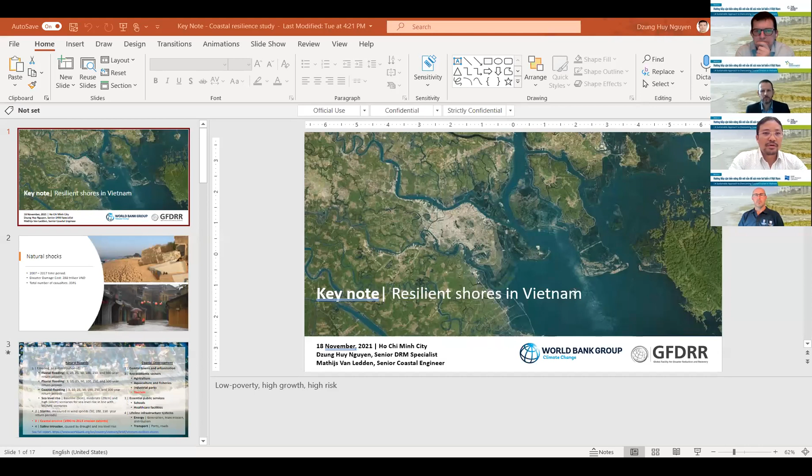Okay. Okay. Hope you all actually see the screen.

Okay. I don't actually need to give you the damage figures in the country, which you have already seen. You're already familiar with this. But the bottom line of this, Vietnam is one of the most vulnerable countries to disasters in the world. So every year the direct damage actually costs about 1 to 1.5% of the national GDP in Vietnam.

With this, our study actually focused on a couple of the key or major hazards in the coastal area, including fluvial flooding, coastal flooding, sea level rise, erosion, and drought as well as salt intrusion along the coast. So of course we use the combination of hazard scenarios, as you have already seen in the slide.

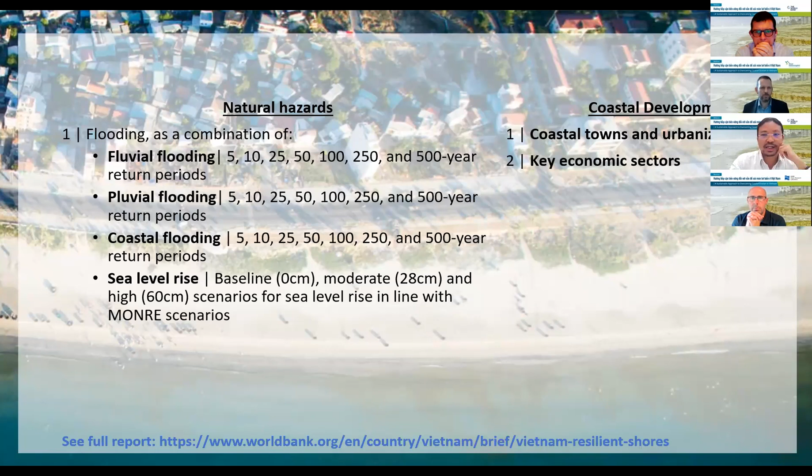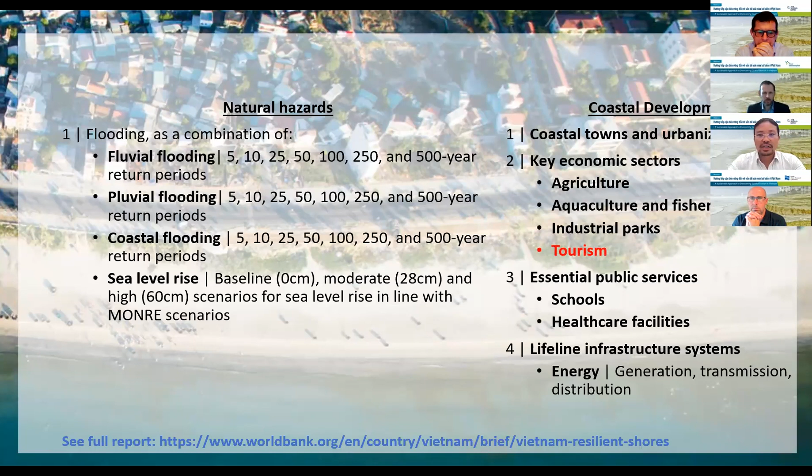Together with this, we actually overlay the different scenarios of hazards with some of the very key economic sectors and infrastructure sectors, including agriculture, aquaculture, industrials, tourism, energy, transport, urban development, school and healthcare facilities. These are the key services and key economic activities in Vietnam, particularly highly concentrated in the coastal area.

All right, so we actually produced a short animation video capturing and highlighting the key results of the analysis, which also tries to show the participants what level of risk the coastal provinces have been facing in the region, and what the risks would be in the future.

The organizer, may I ask you to share the video with the participants, please? Thank you.

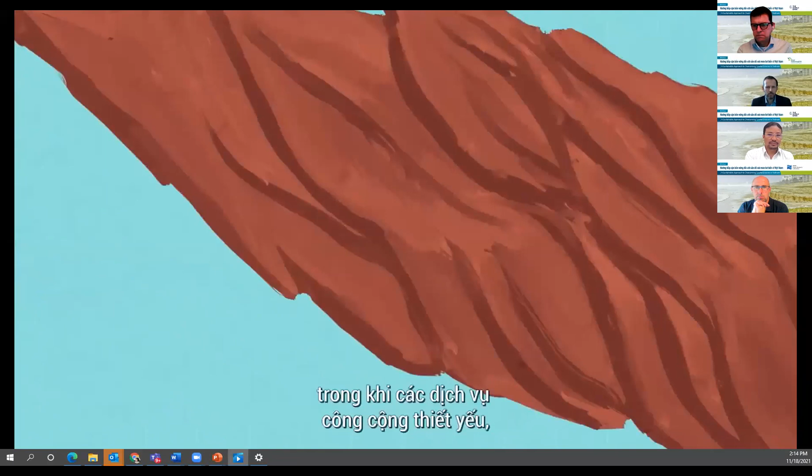With a coastline of over 3,200 kilometers, Vietnam is endowed with coastal areas that have the potential to be powerful engines of development and prosperity. That is, if natural shocks don't put it all at risk. Typhoons, tropical depressions, storm surges, floods, coastal erosion, and saltwater intrusion regularly threaten livelihoods and reverse years of successful development. Such climatic shocks impact virtually all key economic sectors: agriculture, fisheries, tourism, and industry. Lifeline infrastructure systems like energy, transport, and water face heavy disruptions, while essential public services such as schools and hospitals are affected.

In Vietnam, more than $2 billion in assets are lost every year due to natural hazards. And that doesn't even count the impact of disasters on people's well-being and livelihoods. The country has been hard at work, making impressive progress in managing disaster risks. Over the years, the government has put in place strong legislation, effective weather forecasting, successful community-based programs, and an extensive dike system. But urbanization in coastal areas is rapidly growing. This also means that more and more people are at risk, and new developments are focused in high-risk areas as safe locations are already occupied. Climate change will only increase these challenges.

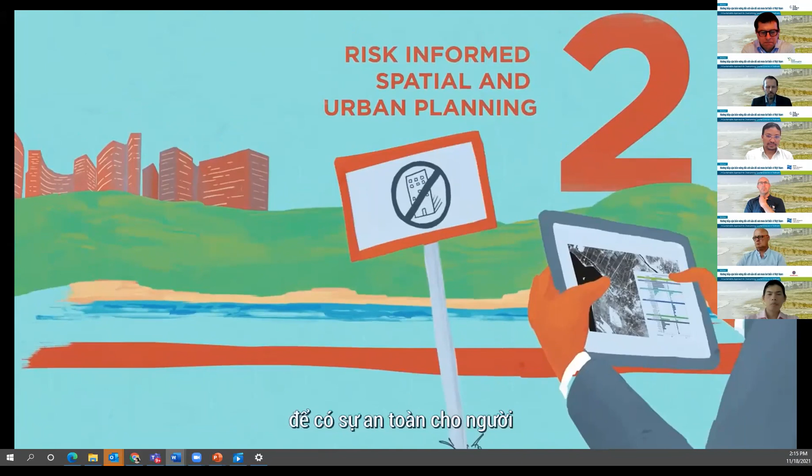In the face of increasing disaster risks, the World Bank's Resilient Shores report highlights 5 key recommendations to help Vietnam strengthen the resilience of socio-economic development in coastal zones. Better hazard data and asset management systems need to be established to enable people to make robust decisions in all sectors. Risk-informed spatial and urban planning needs to be ensured to keep people safe and make resilient investment decisions. The resilience in infrastructure systems needs to be strengthened through reinforced safety standards and better design and maintenance. Upgrading dikes is a necessity. Nature-based solutions have a lot to offer and must not be overlooked.

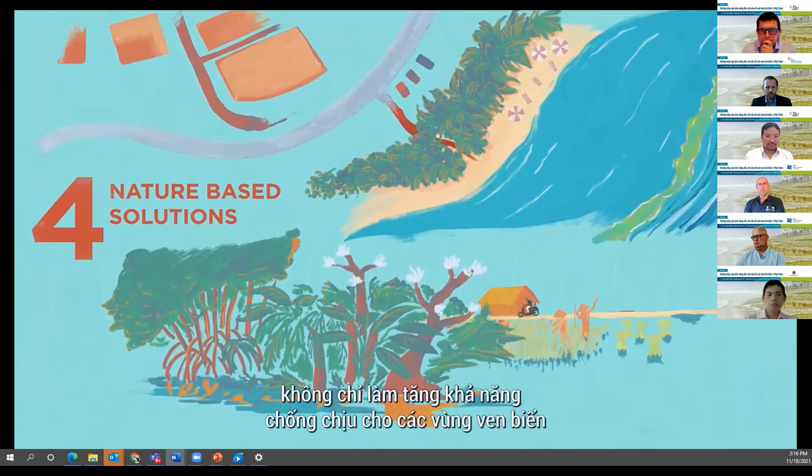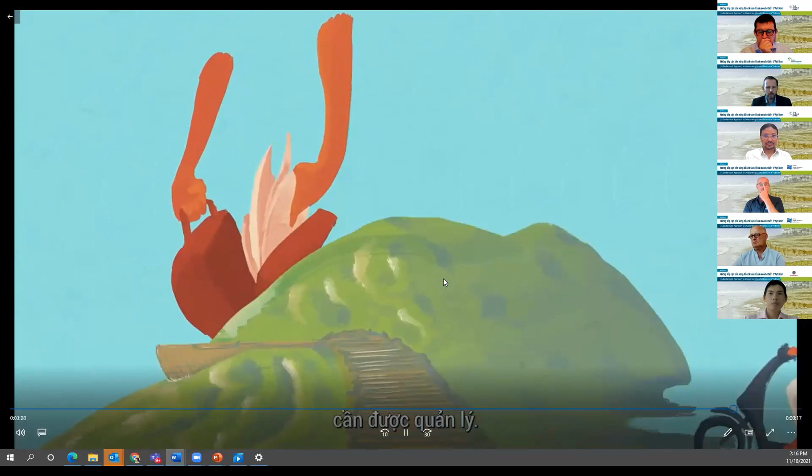Restoring and protecting natural shields such as sand dunes and mangroves not only increases coastal resilience, but yields valuable economic opportunities for communities. Early warning systems need to be improved, while emergency planning, civil protection, and a comprehensive national financial protection strategy can greatly improve Vietnam's capacity to respond and recover from shocks. Vietnam's coastal areas have potential to be home to prosperous and resilient communities, towns, and cities. However, opportunities in the coast come with risks that need to be managed. But by striking a balance between risk and opportunity, it is possible to safeguard Vietnam's coastal development for generations to come.

Yeah. Thank you so much. Let me go back to the presentation. Okay, over to you, Mathijs. Thank you, Dzung. And next slide, please. Yeah, I'm trying. Why doesn't it move? Okay, sorry. Here it is. Okay. Yes, please also show the graph.

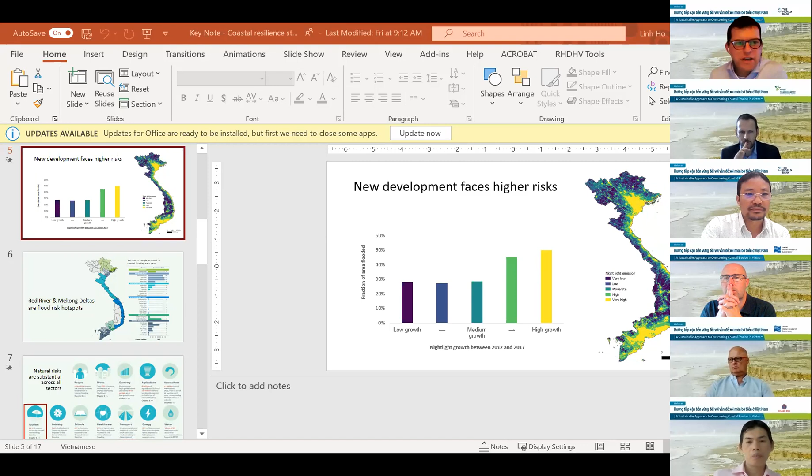I think the computer actually reacts slowly. Oops. I'm sorry. Oops. Perhaps we need help from the organizer. Sure. If you also can please open the presentation and help us to manage it. I think there's some technology problem on my side. Thank you. Yes. Can you start sharing the full screen, Linh? This slide, yes, please.

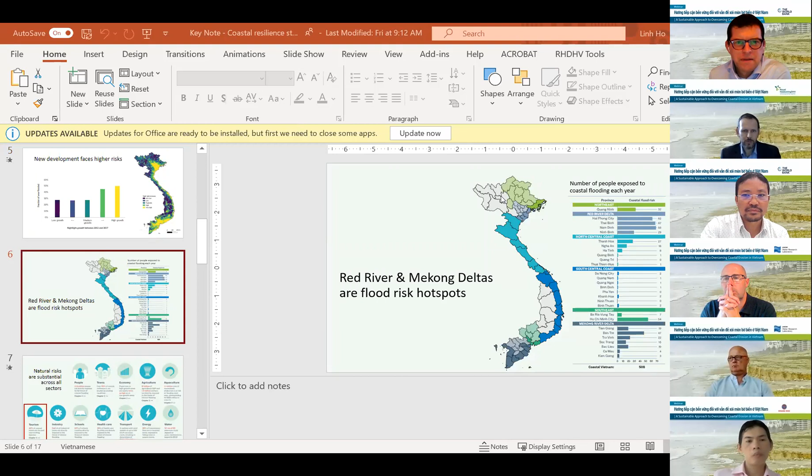Thank you. Yeah, this is another example of one of the results. So the graphic here shows you the people who are at risk in the various coastal provinces in Vietnam. Very clearly, this graphic shows that mainly in the north, in the Red River Delta and the various provinces over there, but also in the south, in the Mekong Delta, the most people are exposed. So those areas are the so-called flood risk hotspots. Next slide, please.

So as Dung already said, we have made in this report an analysis of all kinds of sectors in Vietnam, and I think what is highlighted from this report, and that's also the main takeaway for maybe this audience, is that not only tourism assets are at risk, but also a wide variety of other sectors, and those are of course also very important for the well-being and for the sustainable growth of the tourism sector. So it includes people, towns, but also industry and schools, healthcare systems. So all these assets and all the people who work there are at risk. Next slide, please.

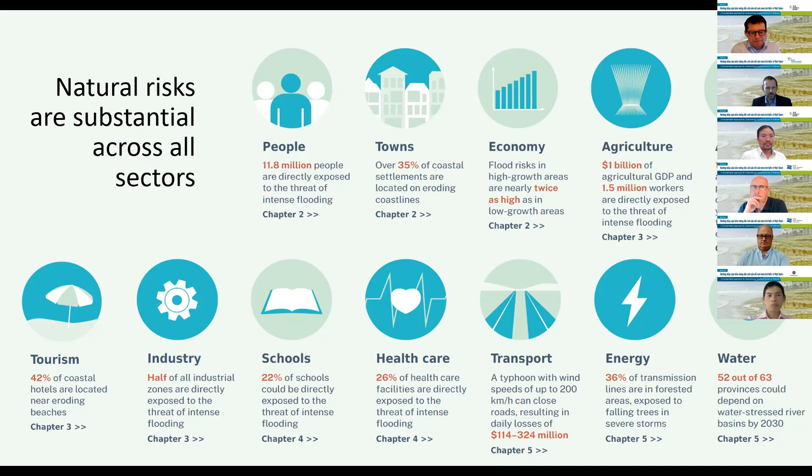This slide tells you the story about one specific asset system, which is very important for certain areas of Vietnam. It's about the dike system, especially in the north and also in the south. So in the Red River Delta and in the Mekong Delta, there is an extensive dike system that protects the area from flooding, and also the communities in those areas. And the report has made an analysis of how the current dike system compares to the safety standards that have been set by MARD. And it shows that many of the dikes in Vietnam do not meet the prescribed safety standards, and significant investment is necessary to bring them up to the standard.

And even then, with the significant growth in the coastal areas, there is also a need maybe to upgrade these safety standards even further and to protect all this economic value and the people who live in the coastal zone. Next slide, please.

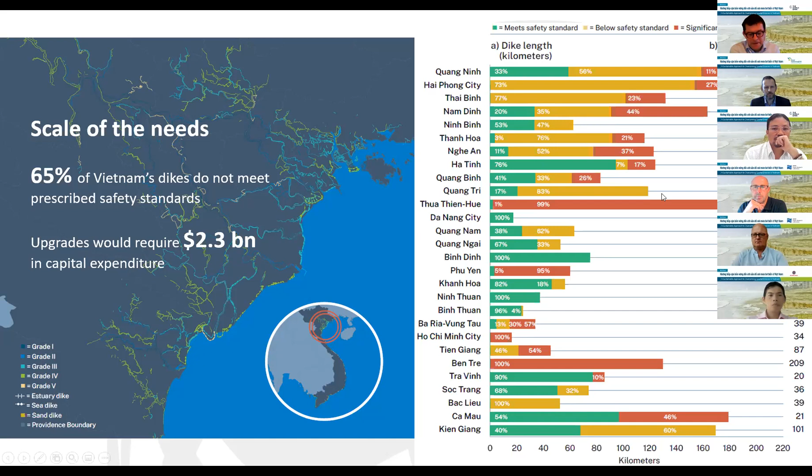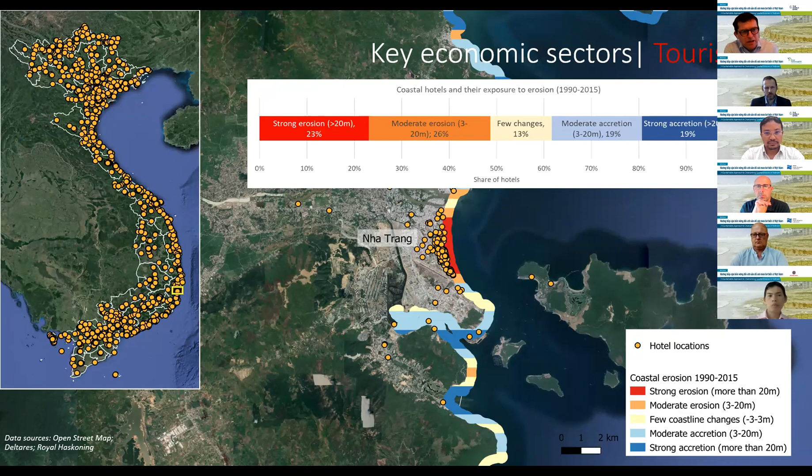So if you zoom in specifically on tourism, then coastal erosion is a serious threat. As part of this analysis, a consistent data set was made for 5,658 hotels all across Vietnam, and that data set has been overlaid with coastal erosion maps, but also with flood maps. And it clearly shows that 60% of the hotels are located within 5 kilometers of the coast in Vietnam, and almost half of them are located near a coastline with strong or moderate erosion. So it shows you again that coastal erosion is a nationwide issue, but it's a particular threat to the tourism industry in Vietnam. Next slide, please.

In the analysis of the Resilient Shores report, we also zoomed into various coastal hotspots to see what kind of strategy could be followed to make the coastline more sustainable. And one of those locations is Phan Thiet. This location has a rapidly developing local economy, and it's also a touristic hotspot which received 4 million visitors in 2017. But this area has also seen severe erosion at several places. In some places, the coastline retreated by over 100 meters.

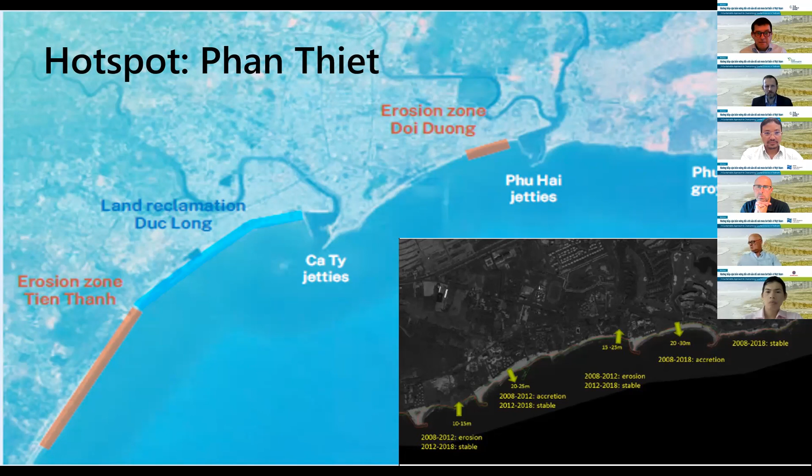So if you walk along the coastline in this area, you see various attempts at all kinds of solutions to combat erosion, from concrete blocks, concrete revetments, geobags. All kinds of solutions have been tried, but none of them have been very successful. And what you can also see is that often these solutions have been taken at a local level to protect one or two specific resorts or a specific section of the coast.

The analysis that has been carried out for this specific area is that the coastline is of course not a static situation. It varies because of storms, so it can sometimes retreat a bit, but sometimes it can also grow back to the original situation. So building assets very close to the coast maybe sounds attractive, but it's not a very good idea. And also these hard structures often interrupt the natural sand transport along the coast, which often gives downstream effects to other locations.

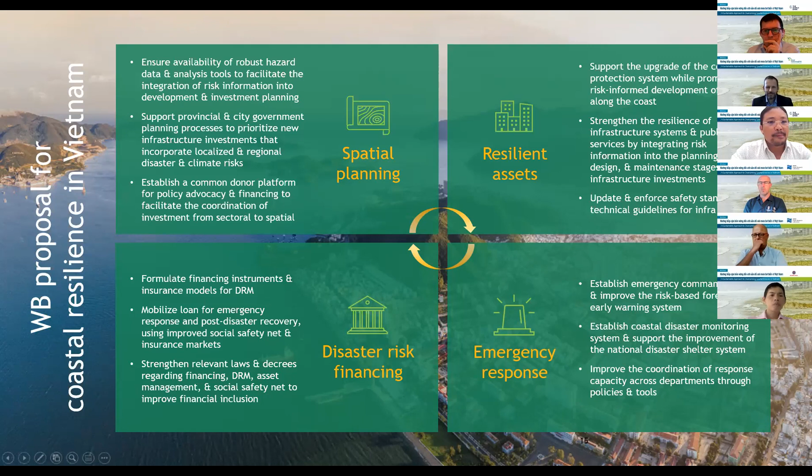So the government of Vietnam right now is working with the World Bank on the first phase investment, which we expect to start being implemented in 2023. So I will stop here and over to you, Justin. If there are any questions, both Mark Tai and I are happy to answer. Thank you.

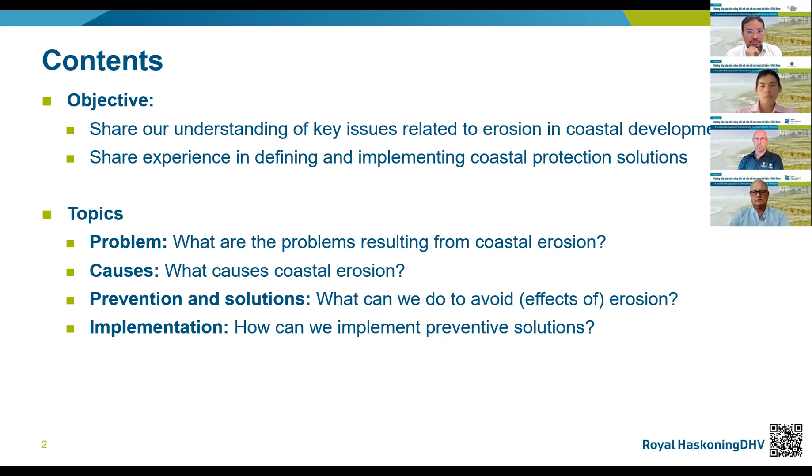A little bit of an introduction about myself. My name is Joost Lansen. I have over 15 years of experience in coastal engineering globally, and I've been working in Vietnam for about 8 years on quite a few projects along the coastline, seeing a lot of changes over time. I work for Royal HaskoningDHV. We're originally from the Netherlands, so we have a strong water protection background, and we have been active in Vietnam for 40 years, working in coastal resilience.

So what are the problems related to coastal erosion? Firstly, here is a very nice quote which we found on TripAdvisor from a tourist who came on holiday to Vietnam: after unpacking, we went over and saw the entire beach had been washed away. Had Booking.com informed us? No beach, just a sheer drop to where the waves were crashing. What a disappointment.

On our last night, we were having a cocktail on the beach bar, which is hanging on a cliff edge, and a digger came down to the beach as the tide had gone out and was moving sand to try and rectify what had obviously been caused by a monsoon. This, and also the pictures on the right, shows that due to local erosion at various developments for the tourist sector, the quality of the beaches is going down, and that's viewed negatively.

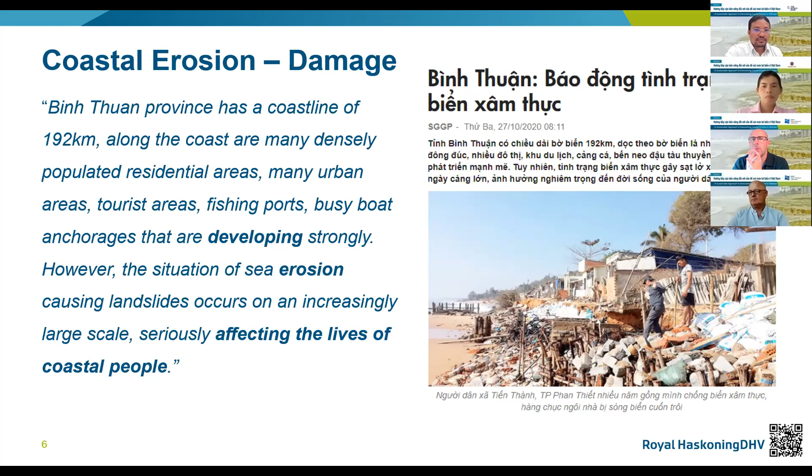So what is really the problem with coastal erosion? Coastal erosion leads to a loss of the beach, which in the end results in an unattractive coastline for tourists. So the beach is gone, which reduces the experience of the tourists there.

It also damages property. We see a lot of property being damaged along the coastline. When it's being built, often we see a nice beach, but over time, due to erosion or during storms, a lot of property is being damaged.

And lastly, there's also a loss of the natural and cultural value of the coastline. A lot of people appreciate, obviously, the beautiful Vietnam beaches. It's being used for fisheries, but also by the local population to go out, but it's being lost.

Lastly, the invested value of a lot of these properties is going down. Because of how visitors appreciate an eroded beach, actually the property value will go down because the appreciation is much lower. And we see a lot of these examples along the coastline.

So what causes coastal erosion? I would like to demonstrate in the coming slides a little bit of the engineering insight into why coastal erosion occurs, because we think it's very important to have that understanding to later develop protection solutions and management solutions for how you would mitigate erosion. So I will touch upon three main causes.

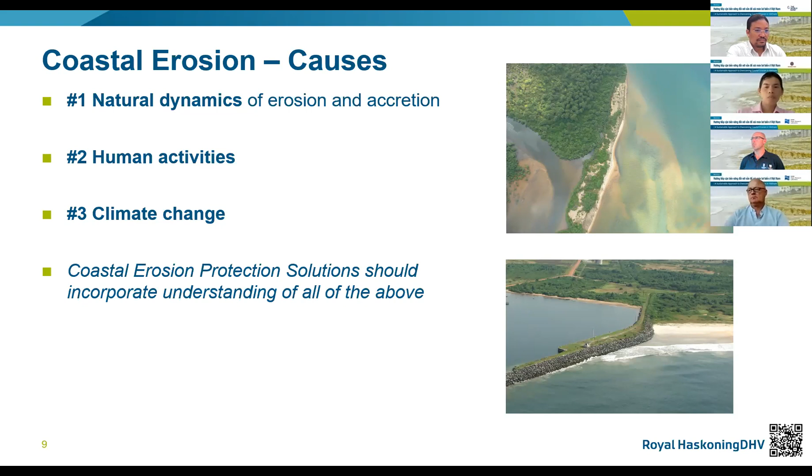First of all, if we look at the beach, you see here a very nice beach with water, waves, and a surf zone. Actually, this beach is subject to the forces of nature—that's tides, currents, wind, and waves.

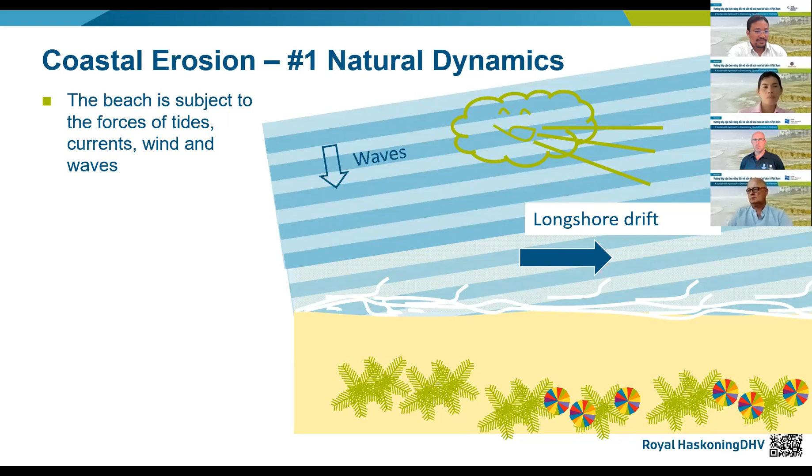If we look at the coastline, this is a schematic picture. We see that there's a beach, there's water, there's waves. But what you often don't see clearly when you're standing on the beach is that there's a longshore drift—some kind of flow along the coastline which transports water but also transports sand. So in the foreshore, there's sand movement being transported by this flow, and it flows as some kind of sand river along the coastline.

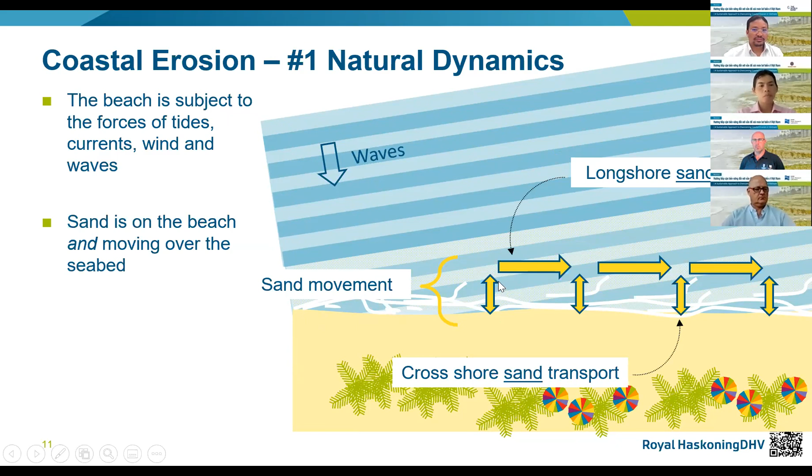Not only is this moving sand, but we also see that sand moves from the beach onto the seabed. Throughout the year, sand is moved from the beach onto the seabed. As a result of this, we see actually that there's a natural variation in accretion and erosion, during storms or seasonal variations.

Waves can be higher, and as a result of that, there will be erosion. So sand is actually put in the foreshore, and in the calm season, the sand is going back to the beach. So when you visit some beaches at different periods of the year, you would see actually that there's erosion and accretion.

One of the key messages about this is that the coastline is by nature dynamic, so any beach needs some space to breathe. When planning and looking at coastal developments, you always need to make sure the coastline can follow its own dynamics and has this space to breathe. So building close to the coastline is often not a very good idea.

Secondly, when we look at human activities, what we often see is that for property developments, structures are often built on the coastline which actually block the longshore transport I was talking about. So this flow of sand along the coastline is being blocked, for instance, by a groin. There's an example in the upper right corner. As a result, one side of this groin will get more sand.

Whereas the other side, there will be less sand, leading to erosion. What we often see is the person on the left is very happy, he has a very nice beach, but the person on the right-hand side is less happy because his beach has been eroded by the structure, which was probably built by the person on the left.

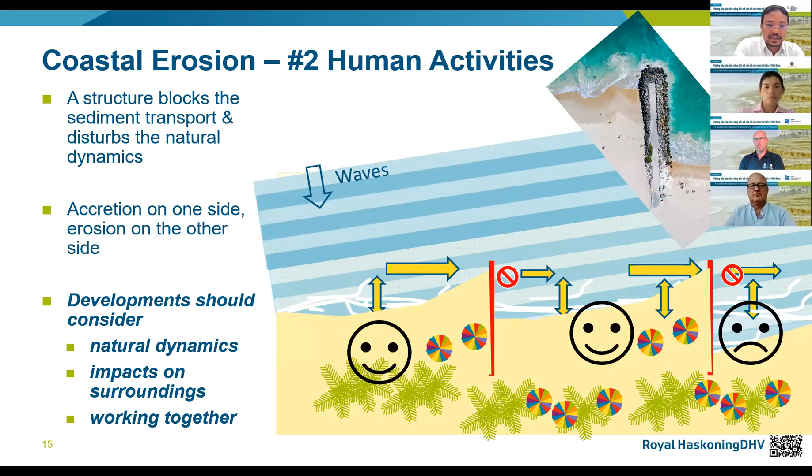And often this is an ongoing process. So the next neighbor also will make something, and then the one next to that will be unhappy. I think the takeaway from this is that when we look at these kinds of developments, we also have to look at the surroundings, the neighbor. The only solution to make a resilient and sustainable beach is to work together, because this process will go on and will not solve the problem altogether.

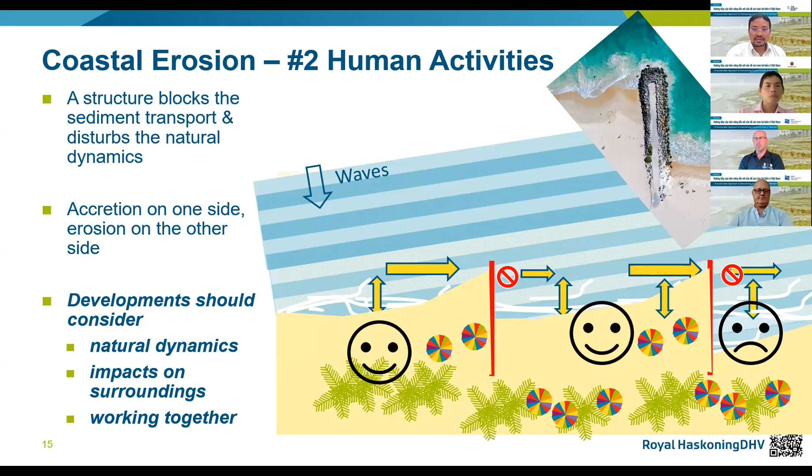So not only do we see this with groins, but we sometimes also see revetments being built. Obviously this stops the erosion, but here too the neighbor will be suffering, and it's also questionable whether, even if erosion is stopped, this leads to a high-value beach.

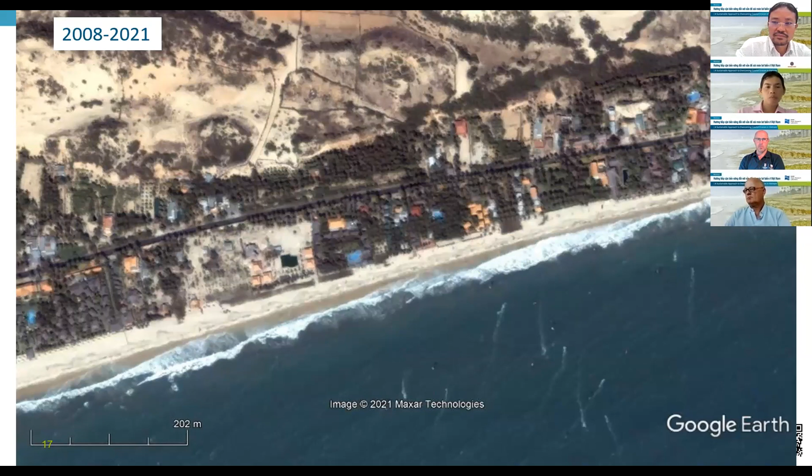Now when we look along the coastline of Vietnam, I think there were some pictures already. This is a picture of a beach in Mui Ne, from 2008. We see a very nice natural coastline. But when we look at the situation today, we see various structures have been built to protect some beaches along the coastline for various resorts, but at some places the beach has disappeared completely.

In this particular situation, some people have been protecting their coastline, but by not approaching it in a consistent way with all the neighbors in the area, about half of the beach has disappeared.

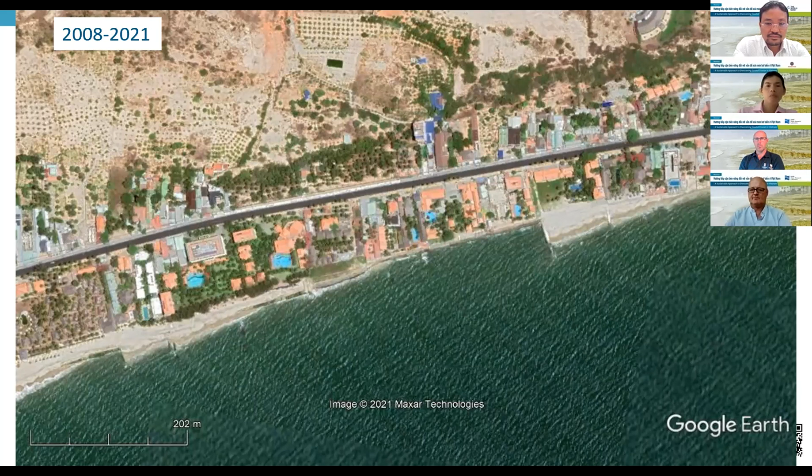Now when we look at the third cause of coastal erosion, that's climate change. We know that due to climate change, sea levels rise, and when sea levels rise, it will in the end result in coastal retreat, because the water level is higher, so it will approach the beach in a higher way. But more importantly...

We see that part of the effects of climate change is that storms will be more intense, or monsoon seasons will be stronger, and that leads to more erosion than accretion in a dynamic situation. As a result, beaches erode. So even without any human intervention, we would see the beach retreating as a result of climate change.

One of the conclusions to be made here is that we know climate change is happening. So if we don't do anything to increase the coastal resilience, erosion for sure will happen. Measures are definitely required, otherwise the beach will erode anyway.

So obviously, as I said, there are solutions to work against coastal erosion for protection. I will touch upon a little bit of what kind of solutions we can think about. This is not going into high detail, but I will touch upon the key understandings.

So what are the benefits actually of protecting the coastline? Obviously you not only mitigate the negative impact of coastal erosion, but you also protect the development itself, and you also protect the beach. Without coastal protection, if the beach is gone, there's also a loss for the natural environment, but also for society as a whole—people enjoying the beach is not possible anymore.

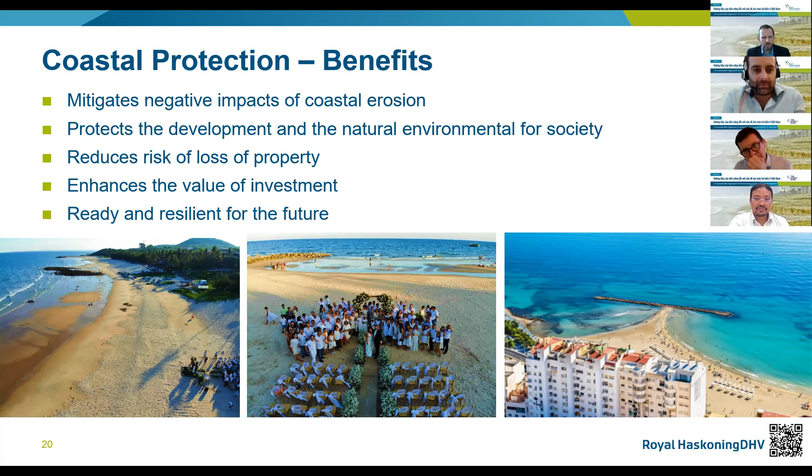So what kind of solutions do we have?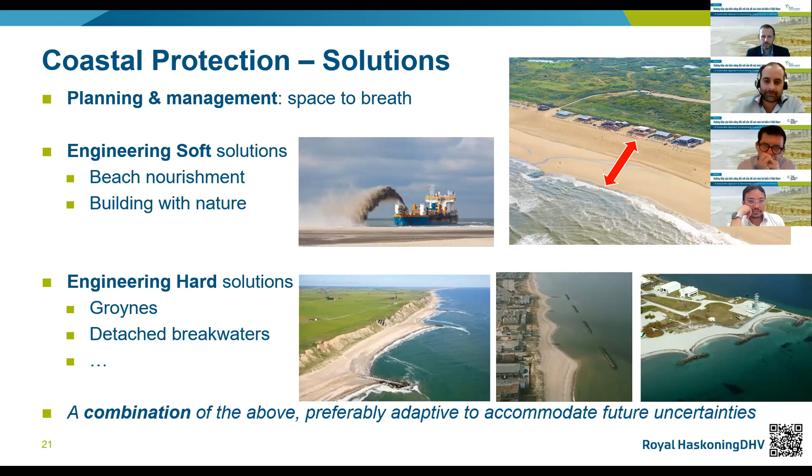So when we think about these protection solutions, how are we developing these? What steps would we normally make to come up with solutions for these properties? There's a few steps we often make when we develop the solutions, and I will try to highlight step by step how these steps are being made and what kind of activities are important.

The first step often is an inception phase where we try to understand the dynamics. It's very important to understand the dynamics of the coastline to come up with proper solutions. So what we try to do in the first step is identify the key issues. Why is erosion happening? Is it a result of storms? Is it a result of human structures in the neighborhood? What is the reason?

Secondly, data collection supports that. There's a lot of data available which can support building up that understanding. Thirdly, when we want to prepare coastal protection solutions, we also need to identify the requirements. What type of coastal protection do we need? Are there any requirements from a regional or national master plan? What are specific requirements from the property development? For instance, if it's a resort, are swimming condition improvements required? And lastly, we'd like to minimize the negative coastal impact as much as possible. So identifying these requirements in the first step is important.

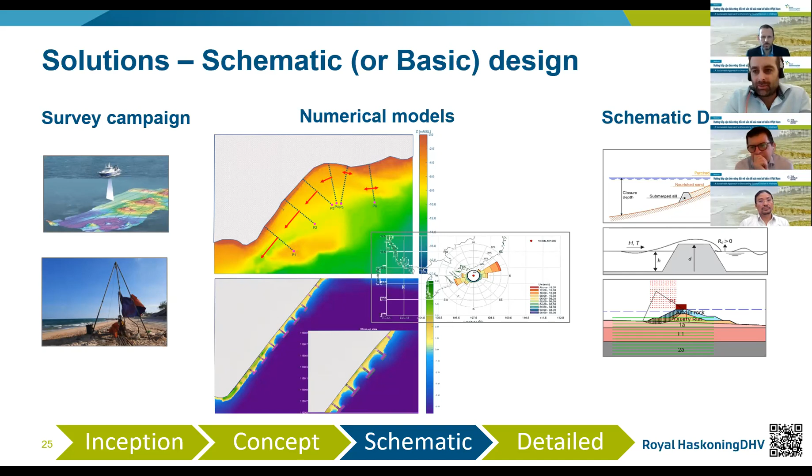When we have a good understanding of the required solution, we go into more detail in the schematic design of the structures, which can be groynes or breakwaters, etc. Lastly, when we have a good understanding and know exactly the dimensions of the structures, we do a detailed design in which we design these protection solutions in high detail. I show one example here, rock, but it can also be a detailed design of a nourishment or a planting solution.

One of the speakers after us will tell a bit more in detail about physical models. Physical models can be used to test some of these protection solutions, whether they are suitable for the local climate, but also whether cost optimizations can be made. So this can be a tool in the design. And lastly, obviously, it's construction.

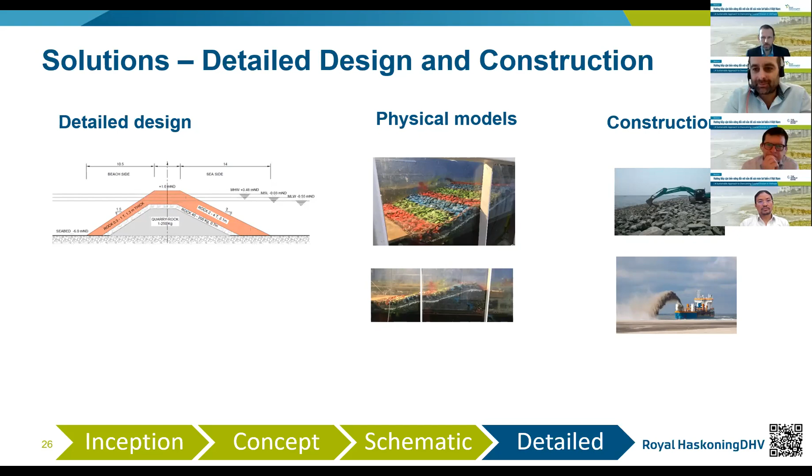So what are the key takeaways of my presentation? What we would like to convey and ask the participants to bring home later this afternoon. Firstly, coastal erosion destroys property and reduces the quality of the beaches. As I've shown, it's not only for tourism, but for all kinds of industries. Because of a vanishing beach, the appreciation would be lower and we lose the natural value of the coastline. Erosion occurs as a result of various causes: natural dynamics, human interventions, and also climate change.

We have to understand these natural processes to develop resilient coastal protection solutions. So we have to have a good understanding of why coastal erosion occurs at that site. And when we develop design solutions, we go step by step in understanding why, and what solution will be best for the site to protect against erosion.

When we come up with these solutions, we need to also consider the adjacent coastline, and collaboration with various parties is required. If we don't do that, we may solve it at one location but create problems in other locations. So lastly, if we want to have a nice beach, it's a common interest for us all. Engineers, but also developers, the government, institutes, universities, so that we work together and come up with good solutions to protect our coastline of Vietnam.

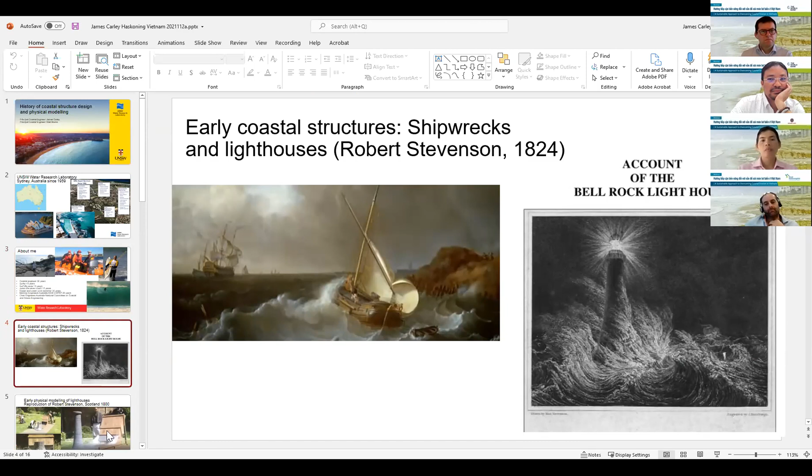This was an 1824 book picture, a drawing of a lighthouse in Scotland. And believe it or not, this is about the earliest physical modelling I know of. And this is a reproduction. So this is not a real photo because there were no cameras in 1800.

But when they designed this, the Bell Rock Lighthouse in Scotland, they actually set up a system that they filled up with water, and they built the lighthouse in front of the water tank and then ran a jet of water down to see if the lighthouse would collapse. So this was around about 1800, the first physical model I know of in the world.

And with the physical modelling, you always try and test it to destruction. So if it stands up, you always put a bigger event in and a bigger one and a bigger one to work out how much it can actually handle before it actually collapses. Now that was the Bell Rock Lighthouse in Scotland. That was the 1800 physical model.

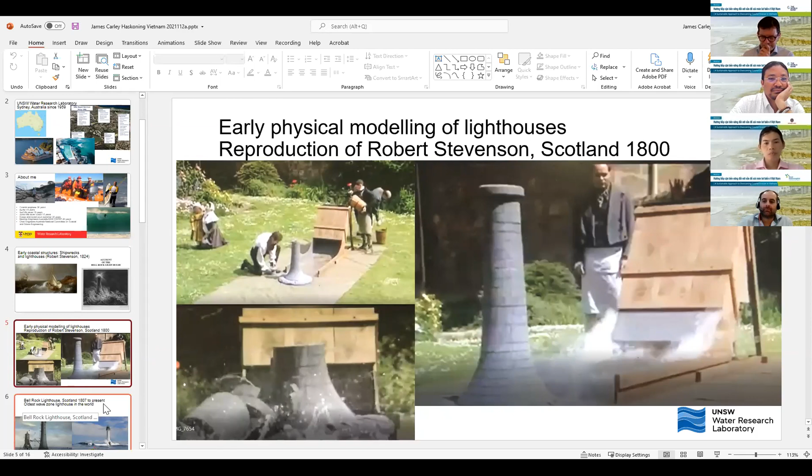That lighthouse was built in 1807, and here it is present day, still there. So it's now the oldest lighthouse in the world that's sitting in the waves. So it's in the tidal zone. It's hit by waves every single day, and its design was originally optimized using a physical model. So that was one of the oldest examples I can find.

Moving a bit more into the modern era. So some of the recent coastal engineering references. So the first major reference in coastal engineering design comes from 1938 by a Spanish engineer, Iribarren, his name was, and he still has legacy in coastal engineering. So he published a paper about how to work out how big rocks need to be to withstand a certain size wave. And that got translated into English, which is my language, in 1949.

In the 1950s, the US Army Corps of Engineers came along and started doing their own work. So what's called the Hudson equation, which is still used to this day by some coastal engineers for rock breakwaters, that was done in 1953. So then from the 1950s onwards, the US Army Corps of Engineers became one of the dominant thought leaders in coastal engineering. So they started producing major publications starting in 1957.

And my organisation, Water Research Laboratory, where Matt and I work, we opened in 1959 to provide advice in this realm. 1973, what was called the Shore Protection Manual was produced, and that is still one of the iconic textbooks for coastal engineering to this day, and it got revised quite often up until 1984.

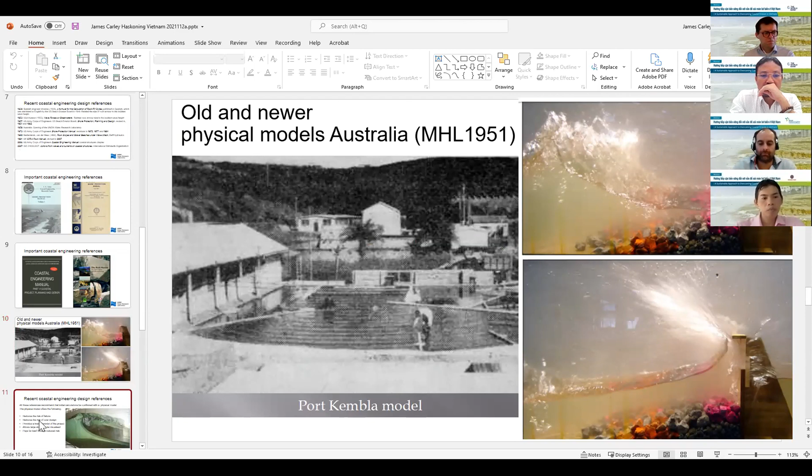So all the textbooks and the design codes that I mentioned earlier, they all provide calculations for how to design coastal protection works, but they all recommend that the publications are used for initial design. And then if it's an important project, you need to physically model it, because that's the only way to get high certainty in the design.

So by physically modelling it, it does the following things. It reduces the risk of failure. That's probably the most important thing, but also can reduce the risk of over-design. So it stops the structure being more expensive than it needs to be. And it provides a faithful 3D picture or model of the project, which is really nice to look at. It allows very large storms to be visualized. So you can dial in any event you want and see what it looks like in the model. So the physical model almost always pays for itself through reduced risk on the project.

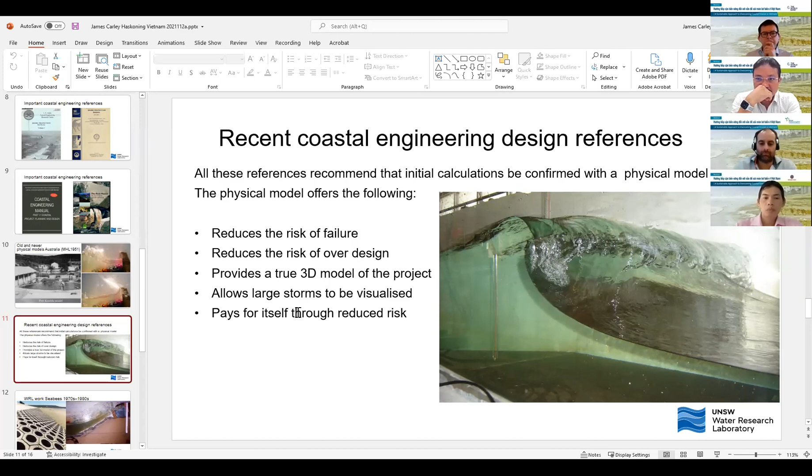So some of the pioneering work done by the Water Research Laboratory over the last few decades were Seabees. These were done in the 1970s. They look like a beehive, concrete hexagon. So these, in the 1970s, were developed at Water Research Lab. Here's a model test of a Seabee wall happening.

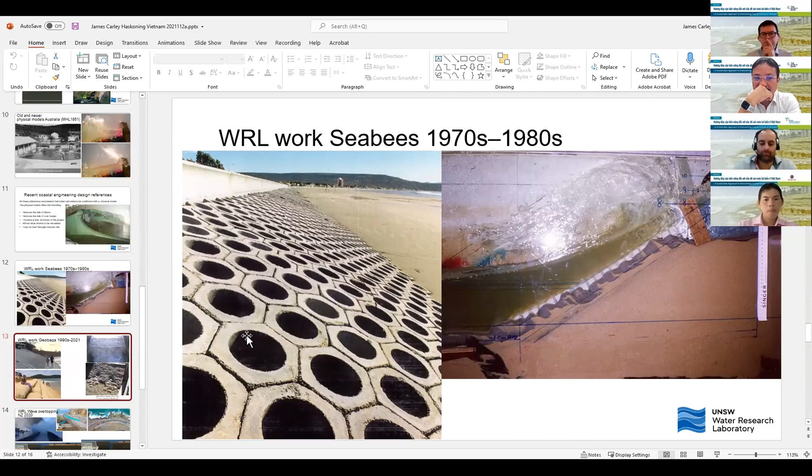Something a bit more recent. So this is the major coastal road in New Zealand, and waves come over the top and damage the cars and the people and the bicycles here. So the waves come over the top of the wall here, through the channel here, and you can see the outcome on the top left.

So we did a physical model of that and ran the waves over onto it, and we can find ways to reduce the overtopping, either through putting extra structures at the base or putting another wall, a wave return wall at the top of it here to stop the waves coming over to protect it.

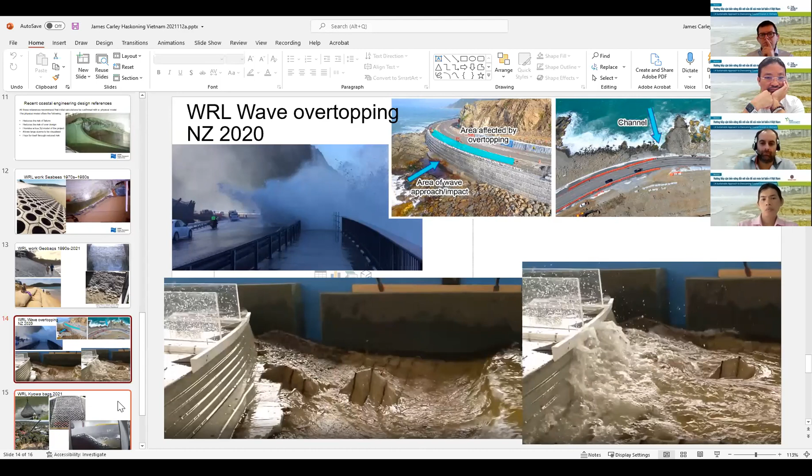So we're just at the moment doing some design curves for those where we build a revetment out of Kyowa bags and we run waves and we work out how big a wave they can withstand before they fail, so that we can develop some design curves so that they can be designed better.

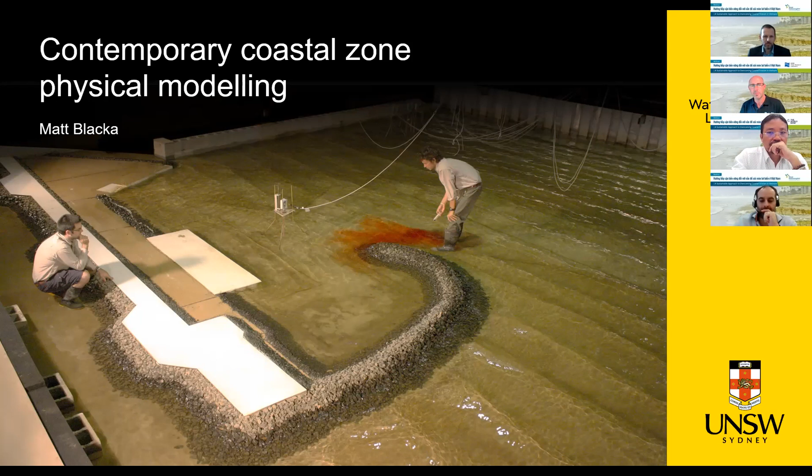In my presentation, I'm going to really step through 5 things. Firstly, I'm going to talk about the different types of models that are used by coastal engineers. And I'm then going to talk about some of the selection processes and why we might choose a numerical model for some problems or a physical model for other problems, and look at how we might arrange a physical model to solve a particular type of problem.

I'm going to run through some nice examples of contemporary physical modeling projects that we've looked at in the past few years and give you an idea of the different types of physical models and how they're used for coastal problems. And then I'm going to provide a quick summary at the end on some of the advantages of physical modeling in particular as a tool, but modeling more broadly.

So we've heard a fair bit of discussion so far about modeling, but if we just take a little bit of a step back and think about what a model is more broadly, a model is just a representation of some process. And in the coastal zone, this process could be anything. It could be the waves breaking on the beach, which is what I've got some animations showing here for. But it could equally be a simulation of the longshore drift process, for example, that was talked about before, or it might be waves breaking on a coastal structure.

And when we think about models in the coastal engineering sense, there's really 3 types of models we look at. There's empirical models, which simulate that process using perhaps previous measurements from field data or laboratory studies. More complicated than that, there's numerical models, which are computer models where you solve some mathematical equations to simulate a process, and that's what's shown in the middle picture there.

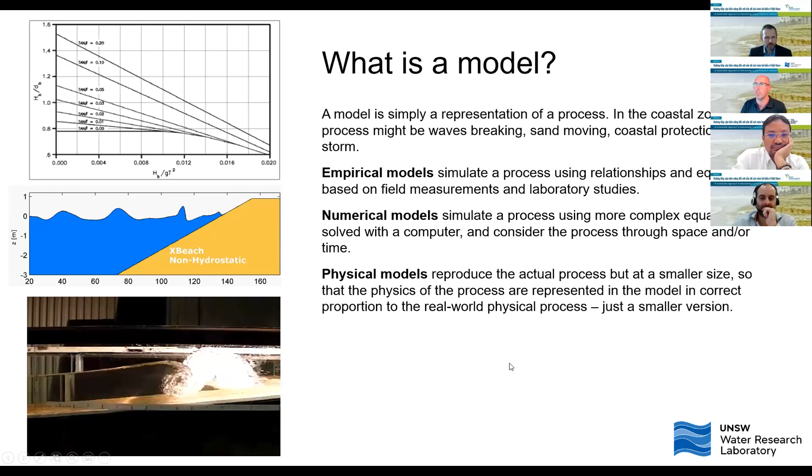In the coastal environment, as it's been pointed out already, there's a few reasons why we might do some modeling. Really, what we want to do though, is we want to be able to predict the response of a coastline or of a structure to the forces and the processes that are going on. So we might want to be able to understand the response of a beach if we put a groin in or a seawall in or a breakwater in.

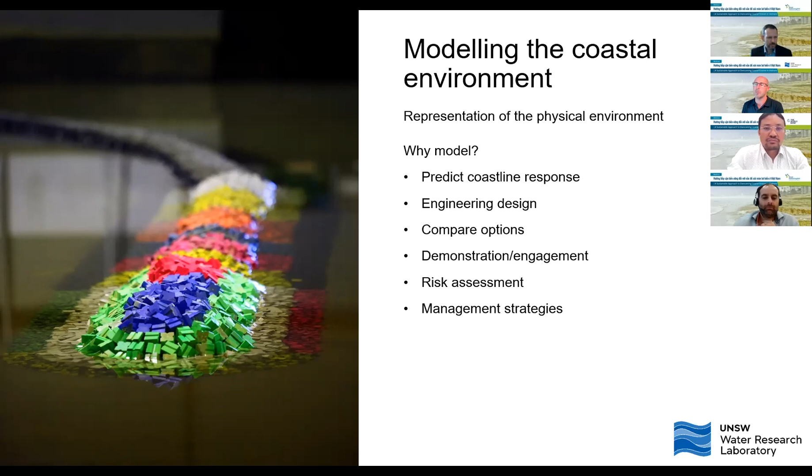We also want to be able to predict the response of a revetment or a structure to perhaps a typhoon or a large wave event, so that we don't get that wrong and we don't end up with failed structures all along our coastline. So the modelling really helps us to understand and to be able to predict these kinds of things ahead of time before we go and build these structures. Models are also used to compare different options. They're used to demonstrate and engage with stakeholders to be able to show what the outcomes might be of a project. And they're used for risk assessment and development of management strategies.

So we might have really big scale processes that happen over days or months. And they might be things like ocean currents or tides, might be over hours or days. And they happen over a big area. Then at the bottom end of the scale, we have things like wave overtopping. And that happens over seconds or minutes and a much more localized scale. And so when we're thinking of a modeling approach, it's often good to think about the spatial scale and the time scale that the processes are happening over.

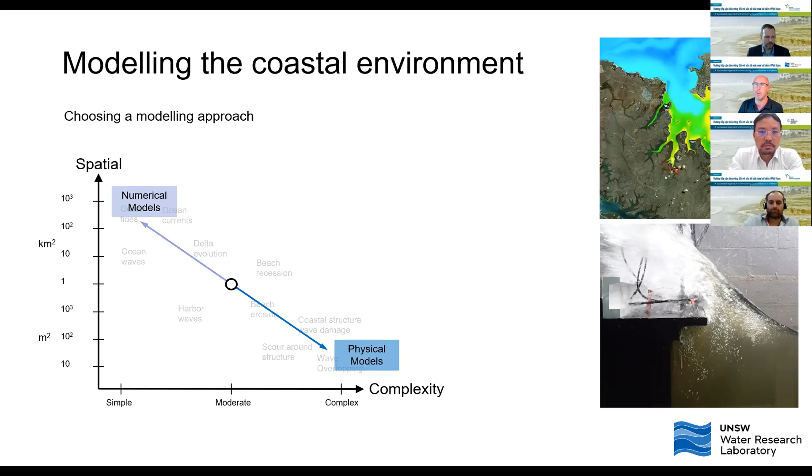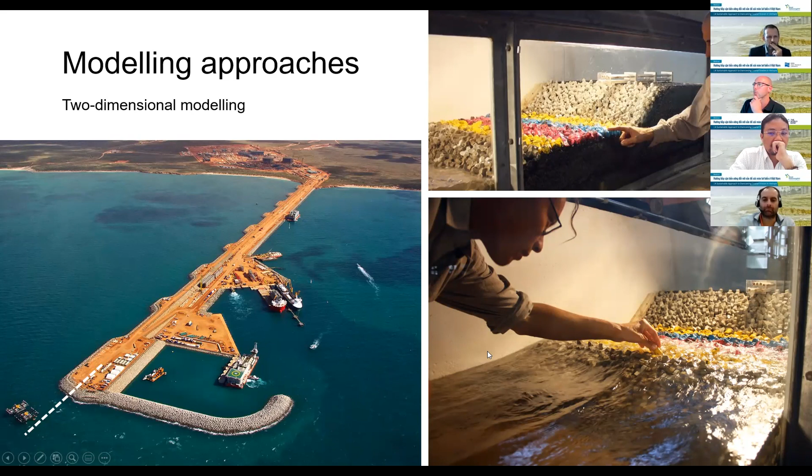In terms of approaches for physical modeling, if we take a big structure like this reclamation here, this is a Gorgon Western Australia project. It's an LNG project that was developed a few years ago. In this particular case, we could choose to do what's called a 2D model, which is a slice through the structure just in two dimensions. And we've got the pictures of that model on the right-hand side here, where we're looking at the armor stability and the profile of the coastal protection there. That's a very simple 2D physical model.

Where things might start to have some three-dimensional processes, we could increase the complexity of the model a little bit. And in this case, we've got models of the head of the reclamation and the head of the breakwater structure here in what we would call a quasi three-dimensional model, where we've got perhaps 2D waves, but breaking on a three-dimensional simulation of the structure.

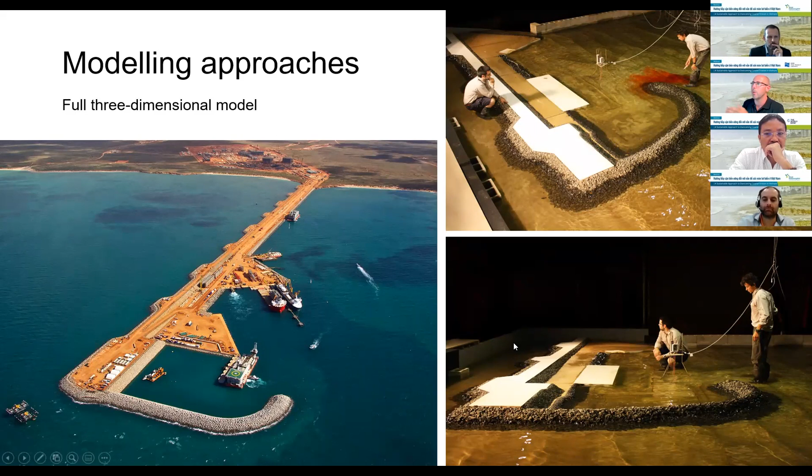And then we have a full 3D model of the same structure. And this is where we're looking at, again, a higher degree of complexity. We're looking at waves diffracting around the breakwater head and what are the size of the waves getting into that harbour and various different processes like that. So there's different ways that we can break a problem up and model it. And depending on the size of the project, you might do simple 2D modelling through to more complicated 3D modelling.

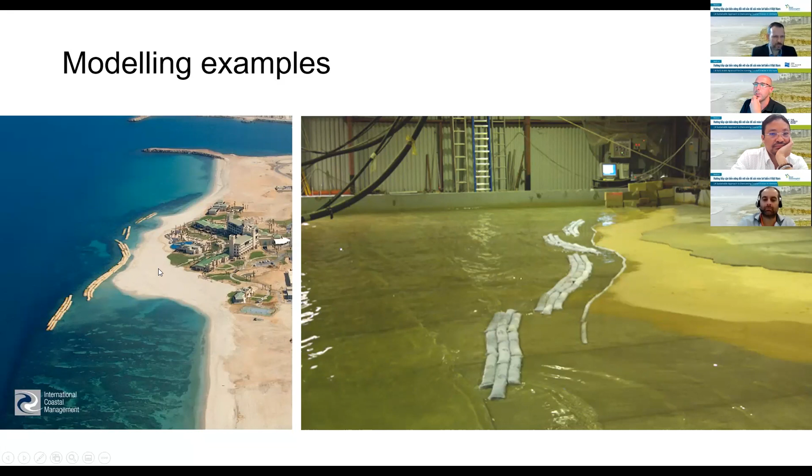I'll quickly show some examples of some nice physical modelling projects we've looked at in recent years. This one is from Abu Dhabi. And in this particular case, we were modelling these large sand-filled geotextile tube breakwaters. And in particular, it was to look at the arrangement of these breakwaters to provide protection to this nourished beach, this artificial beach for this hotel.

The physical model was used to look at waves overtopping the breakwaters and how the arrangement of the breakwaters impacted the currents behind the structures themselves, and to make sure those currents weren't too strong for swimming or for that sand to be stable behind those structures.

The next example is the project called the Palm Beach Shoreline Project on the Gold Coast in Australia. This was an artificial reef designed to build up sand on the beach behind it and to provide protection to the properties right at the back of the beach.

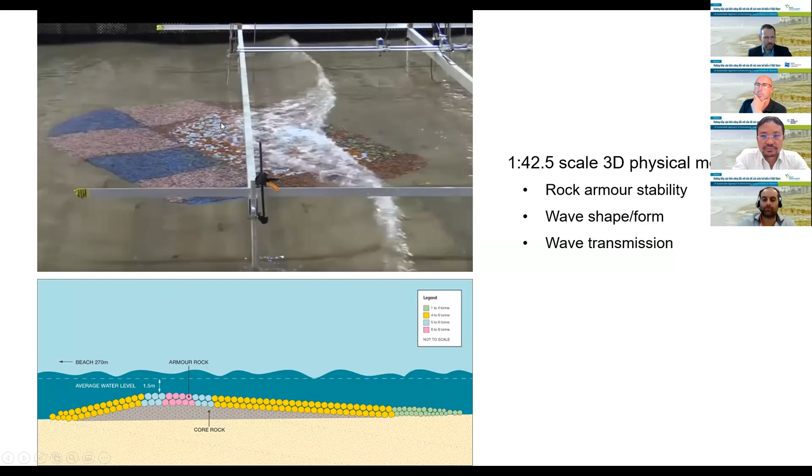In this case, there were actually three different physical models completed for this project. The first model was a big 3D wave model, focused on the shape of the reef and the size of the rock armor needed to be stable. The third model was again a larger scale 3D basin model.

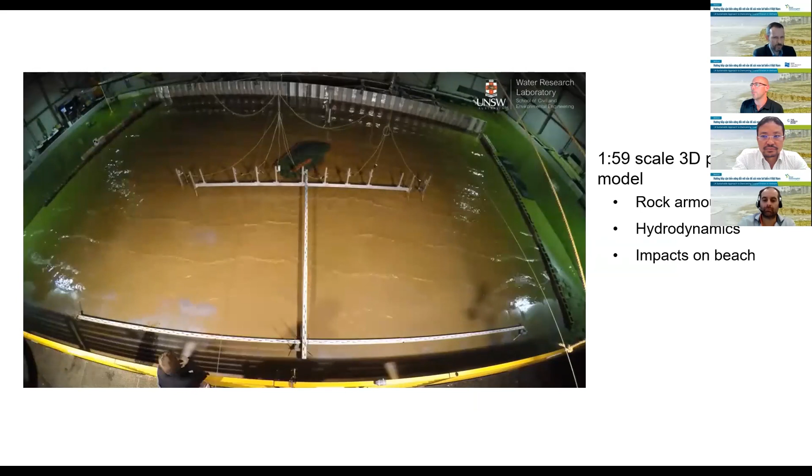It was focused a little bit on the rock armor stability, but more on the hydrodynamics and the currents that the structure generated. So you can see here we're using some dye to look at the wave-driven currents in the lee of that artificial reef. We also have some lightweight sediment on the beach, looking at how that sediment was moving in response to that structure for different wave climates.

The physical model really does allow a high degree of complexity to be reproduced, and you can see the shape of the waves and how the reef is deforming those waves and the subsequent impacts on the beach and the currents and that kind of thing.

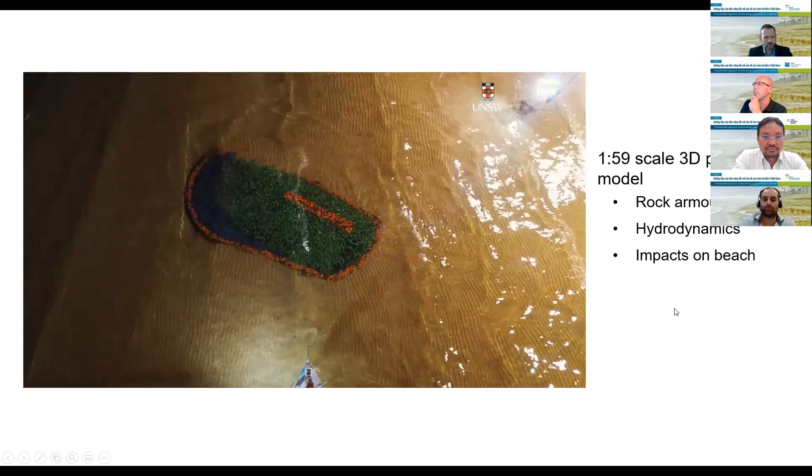This particular project was a detached breakwater, and the physical model was used to investigate the structural design of the breakwater. The right-hand side here shows some laser scans of the model where we were looking at displacement of armor stones off the structure and trying to work out how big the rock needed to be and how high the crest should be. We were also looking at the response of the beach to this structure to make sure it wouldn't cause additional erosion, and it would in fact generate some accretion of the shoreline.

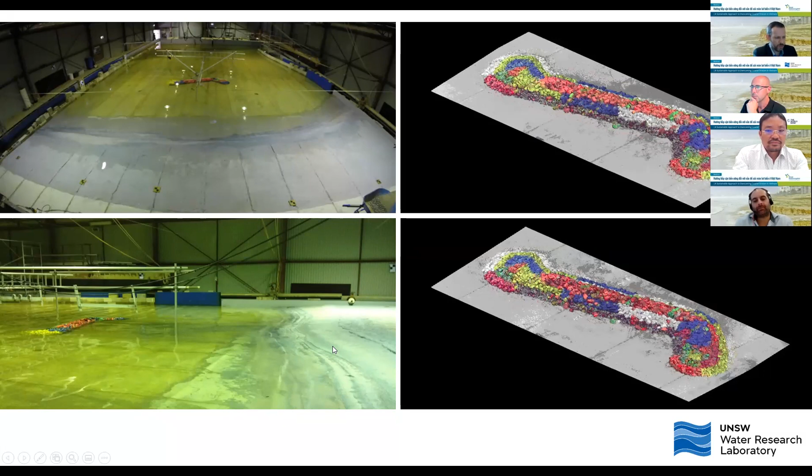Lastly, this is an example of a 2D revetment model where we were using this model to investigate, again, the size of the rock armor to provide a stable solution, and also the height of the crest of the revetment to resist typhoon waves. This is in the Philippines.

You can actually see under some of the bigger waves here that the armor stones are actually dynamic, so that the waves are actually able to move them. The physical model, again, allows us to visualize the problem and be able to predict very accurately how big those stones should be.

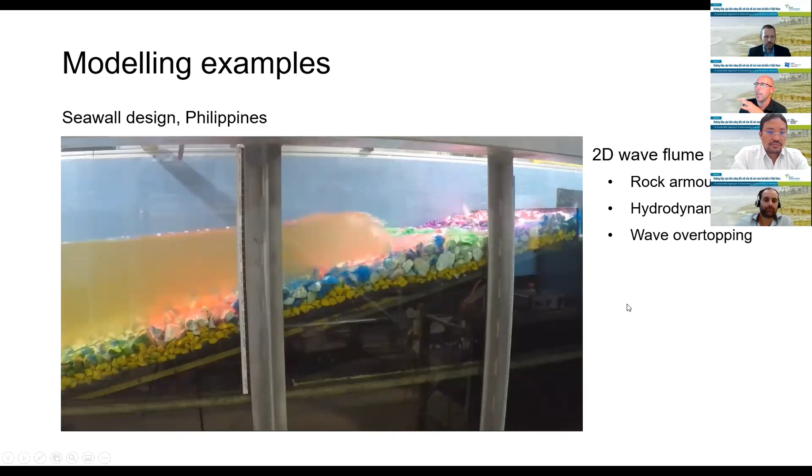So in summary, physical models and numerical models are both great design tools for coastal problems, allowing us to predict ahead of time how a piece of coastline might respond to perhaps an intervention or to a future sea level state or wave problem, or a big design storm or something like that.

Physical models have particular advantages where there's a high degree of complexity. So if we're trying to look at something like waves impacting on a seawall, and we want to be able to build that seawall strong enough that it doesn't fail and make problems worse, or where perhaps you might have a structure that could cause additional erosion to your neighbours, and where there's a lot of things going on, which is often the case in coastal problems, that's where physical models are the best solution we have to simulate that.

They allow us to visualize real situations at small scale and to be able to test changes to a design quite quickly and look at the implications of those changes. As James said, they really allow us to save on construction costs and optimize design costs, which is another big advantage of them.

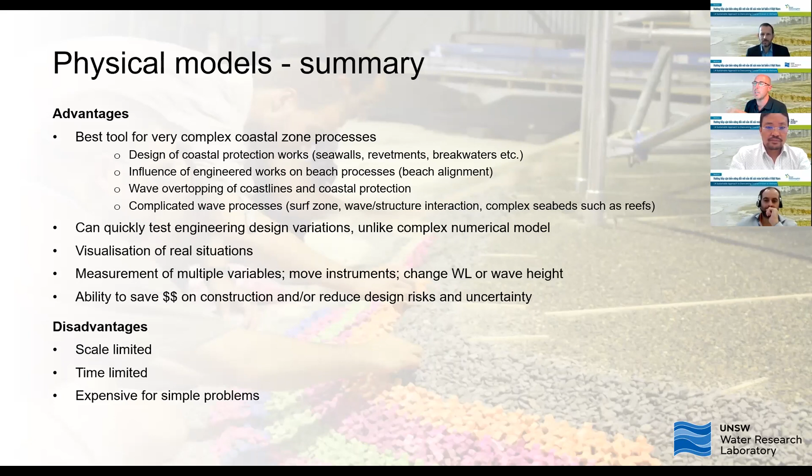Some disadvantages: they're limited in the spatial scale that we can reproduce, and they're limited in the duration of the events we can reproduce.

Contemporary physical models, though, are not usually used as a sole design tool anymore, perhaps in the older days like James showed they were. These days they're nearly always used in combination with numerical models, where a computer model might predict wave processes for a bigger area, which then forms the boundary condition for a physical model.

We like to see physical models used at different stages of a project, from rapid concept or proof of concept testing all the way through to design verification at the end. They're a useful tool for different purposes at different points. As I showed, it's often cost effective to break a project up into several smaller physical models instead of one big one. So that's physical modeling in a nutshell in 10 minutes. Thank you.

Brilliant, thanks James, Matt, a really interesting presentation. Fascinating to see that more than 200 years ago physical models were already being used, and to see how they've developed and the advantages they can bring to a project. Really clear and interesting, and fantastic.

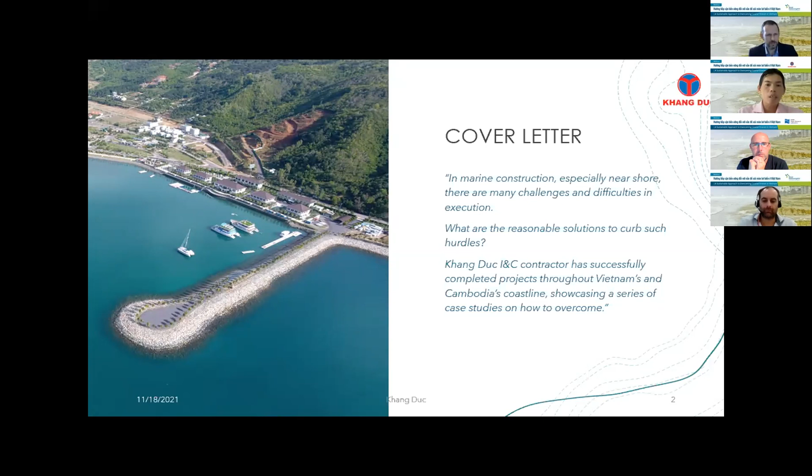In marine construction, especially near shore, there are many challenges and difficulties in execution. What are the reasonable solutions to cope with such hurdles? Khang Duc I&C contractor has successfully completed projects throughout the Vietnam and Cambodia coastline, showcasing a series of case studies on how to overcome them.

The agenda for today's topic comprises 3 sections: company introduction, outstanding related projects, and difficulty, challenge, and solution. Now let's start with the first section, the introduction.

Khang Duc's mission is achieving customer trust and satisfaction in every project, with a vision to become a leading marine construction brand in Vietnam. The driving force for Khang Duc to actualize this target is a solid team gathered by a professional and dynamic leader, together with specialized equipment.

There are some major milestones. Khang Duc was established in 2009. In 2013 we transformed into Khang Duc Joint Stock Company. In 2018 we were awarded the first nearshore renewable energy project as general contractor for civil work. In 2021 we became a top 3 EPC contractor in marine works. And in 2025 we are targeted to become a public corporation.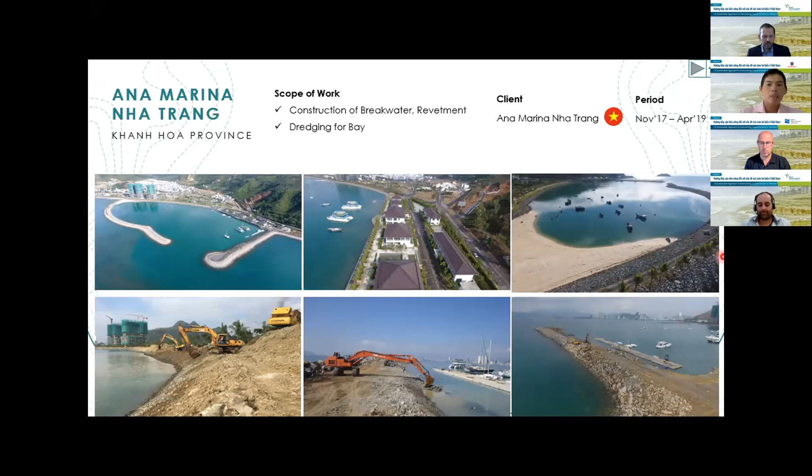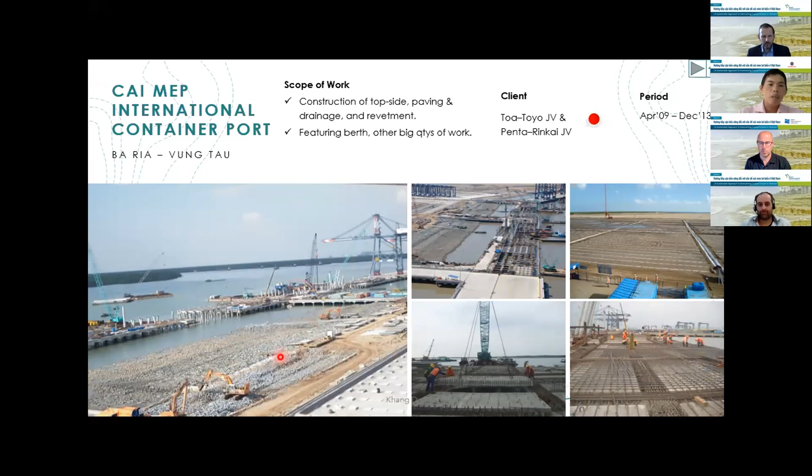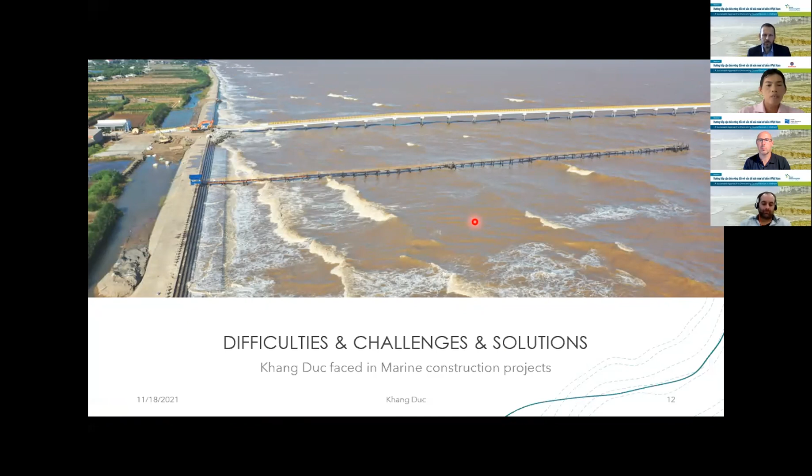The last section covers the difficulty, challenge, and solution Khang Duc faces in marine construction projects. For difficulties and challenges, we can summarize them into 5 major categories, and now we'll go into each category. For weather conditions: wave, wind, rain, tide, monsoon season, coastal erosion, inaccurate local weather forecasts, evacuation plans, and lack of construction equipment.

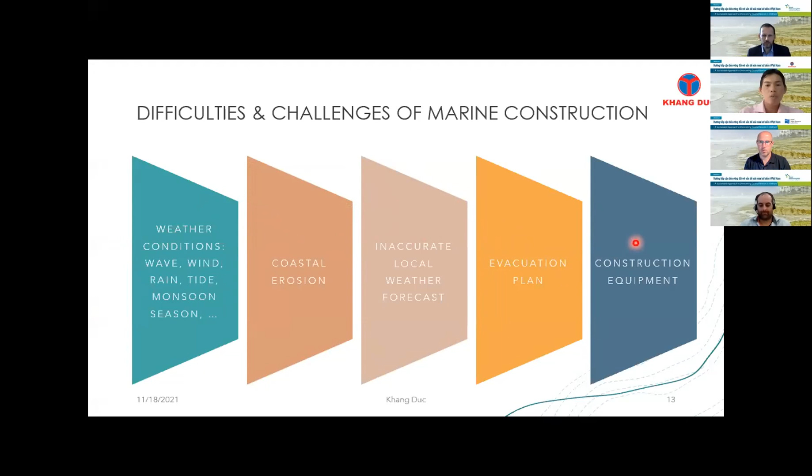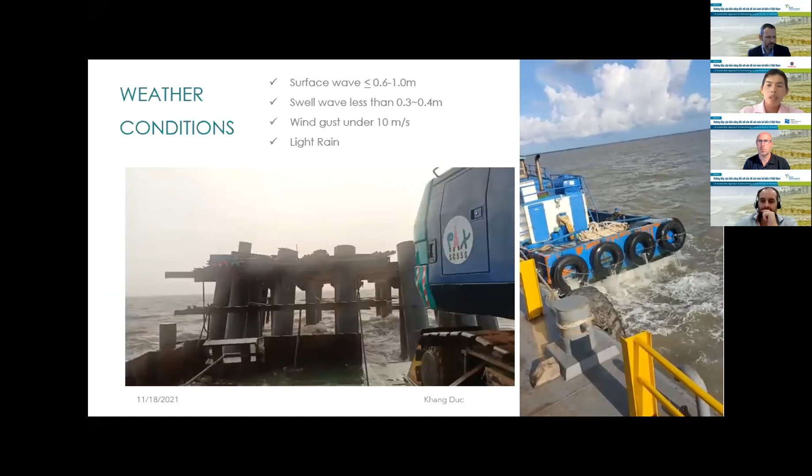Of the weather condition on shore, the workable condition for construction is: wave height 0.6 to 1 meter, swell wave less than 0.3 to 0.4 meter, wind gust under 10 meters per second, or light rain.

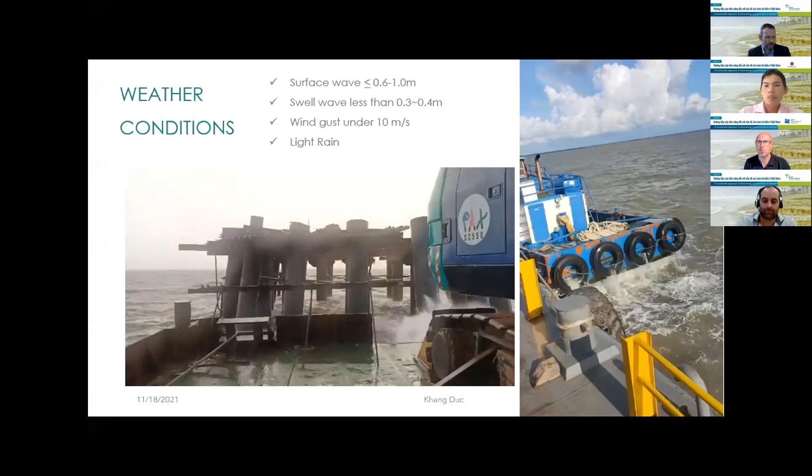Nearshore projects, especially the intertidal zone, are affected by differential water levels in a day, with usual tidal range between 2 and 3 meters, sometimes 4 to 5, making it difficult for equipment arrangement.

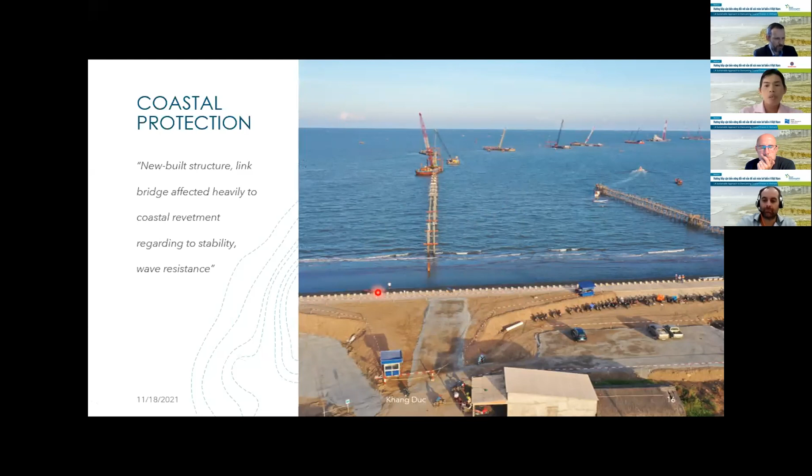Coastal erosion: our country is one of the few countries heavily suffering from sea level rise caused by climate change. Consequently, the coastline is increasingly eroded. This picture shows the newly built pile bridge structure heavily affecting the coastal revetment regarding stability and wave resistance.

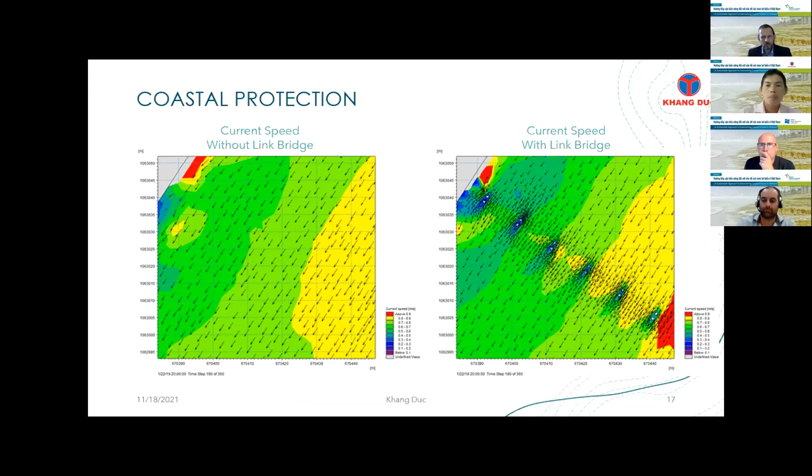Here is the diagram analyzed by the MIKE 21 flow model program, simulating the wave flow based on the design data of Linda Hurricane, the strongest storm to hit the southern region in nearly 25 years, back in 1997. The left picture shows the scenario without any protection, and the right picture shows it with the protection solution.

Our company acknowledged this potential risk, so we designed and built a 3 T-groyne dykes to trap the sediment, thereby reducing reflective wave pressure on the pile. This is the sediment accumulated at the base of the pile.

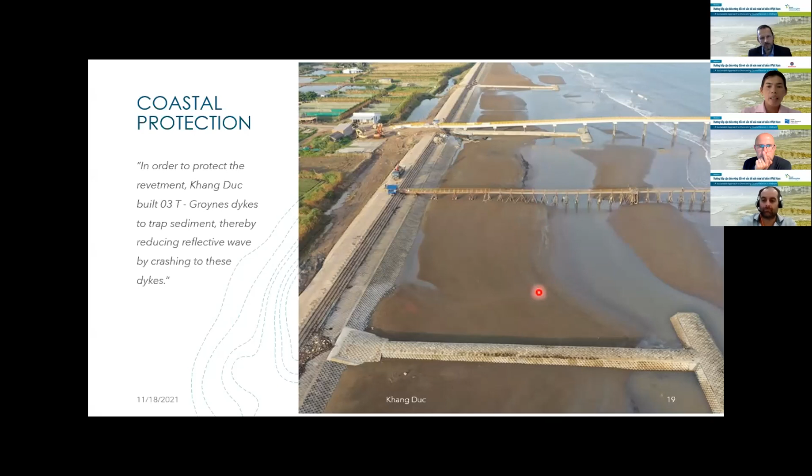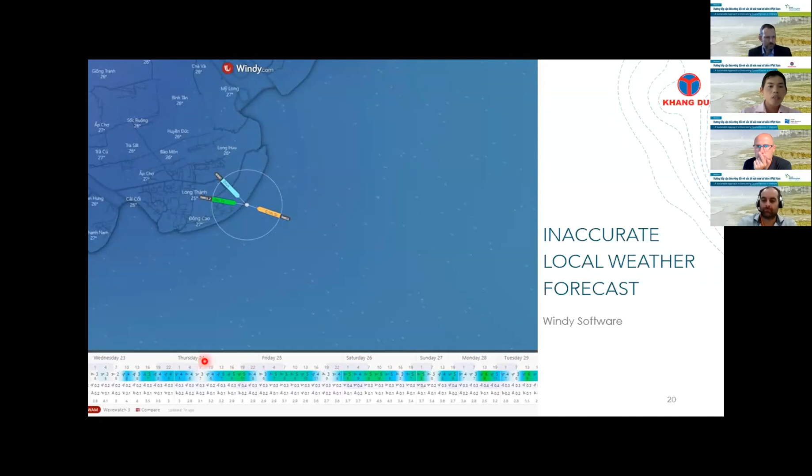Inaccurate local weather forecast: this figure shows the weather forecast for a week. This picture shows the weather forecast from a licensed provider, but it is not accurate for the working region because there are not enough hydrometeorological stations to monitor weather throughout the country, causing trouble for contractors to set up a realistic schedule for the project.

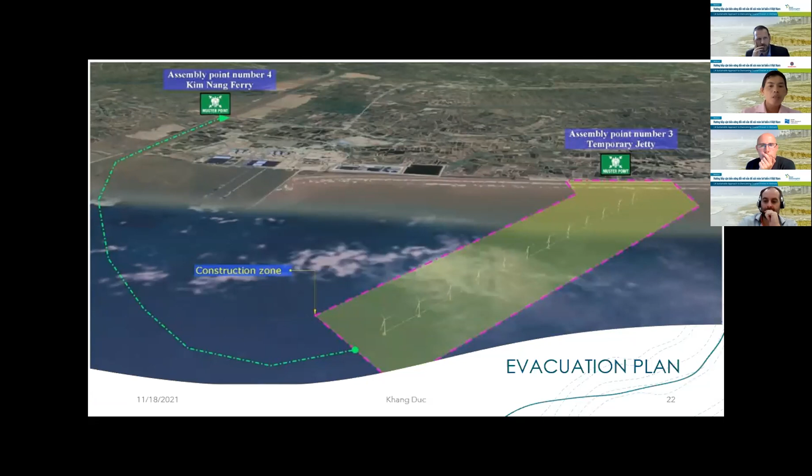Here is the map describing the evacuation route for equipment in an emergency case. This is the same refuge location on the river for equipment after evacuation.

Refuge areas for equipment and workforce shall be planned in advance and practiced in trials before extreme weather happens. Choosing the distance from the site point to the refuge point or muster point is very important for safety, and should be as near as possible while harmonizing with the working schedule and safety issues, with the motto: safety is the first priority.

Most sites had no approachable access. There are various permit approvals needed from government, like border police for entrance of equipment and laborers, agreement for location of construction on sea, and the EIA assessment - the environmental impact assessment on how to protect the environment, aquatic life, resorts, and coral.